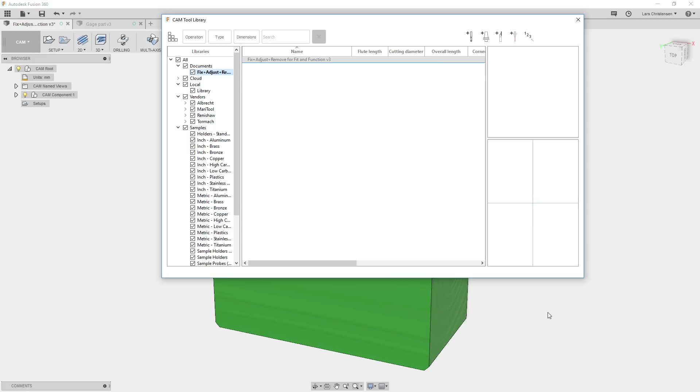You can go back and look on Thursday's live stream if you missed what this generative can do. The other thing I gotta touch on quickly was Friday's live stream on what's new in Cam. If you go in to create a tool library and create a new tool - doesn't really matter what you do here - but we talked about in Lathe that there was a custom thing that was supposed to be here, a new thing that was added. I kind of had to abandon ship on that one.

Well, this one is kind of funny - I should have checked it out before I went live, but you know, who has the time? It was never released out of beta in Cam. That just got missed in the whole process of making everything live. That specific function did not get released out of beta.

But that's not a problem, because if you are using Cam, you can absolutely turn beta on. So let's do that. Inside of Fusion, follow me along here, because there's gonna be a couple of clicks and you just gotta get this right, but you can always rewind the video, of course.

Go to the file drop down, go to view, show text commands, then you get this one little thing here. Make sure that this one is down in the lower right is set to text. Then you type in here: cam, C-A-M, dot beta mode, space, slash on. Hit enter.

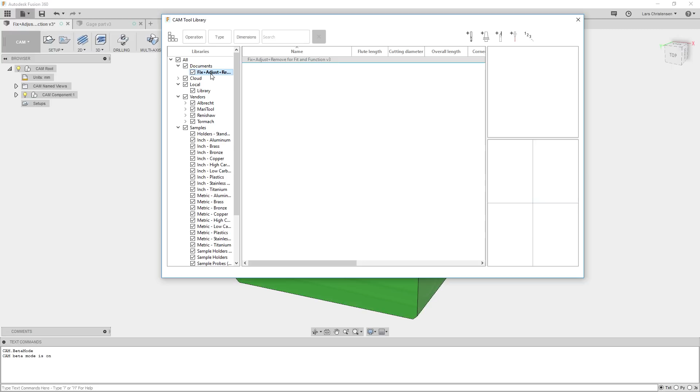Now if we go back into creating a tool library, you will see that this custom function is in here, where you now can create your own custom inserts. Same thing with the holders, custom. So that's how you turn it on or off.

Now if you want to turn it off, you just go back in here, and you probably already figured it out: cam.beta mode space slash off, and it's now off. Then you can go back up to the file drop down, go to view, and say hide text command, and you're back to where I was at.

So just 5 minutes here, just had to correct a couple of things. But yeah, inside of beta mode, you can turn that on and have access to all the beta things that the CAM team is developing on, which is absolutely awesome. And that thing with the custom inserts and custom holders in the lathe, that's where you now can find them until they get released.

Okay, so today we're going to talk a little bit about adjusting, working with models. So what I'm going to do, I got a couple of questions from a couple of people.

One was in regards to 3D printing. The question specifically was, what do I do if I have made a part and I realize that the holes, so I have 2 holes in this part up here, what do I do if they are not the right size? How do I edit them the easiest way? So I'm going to talk about that.

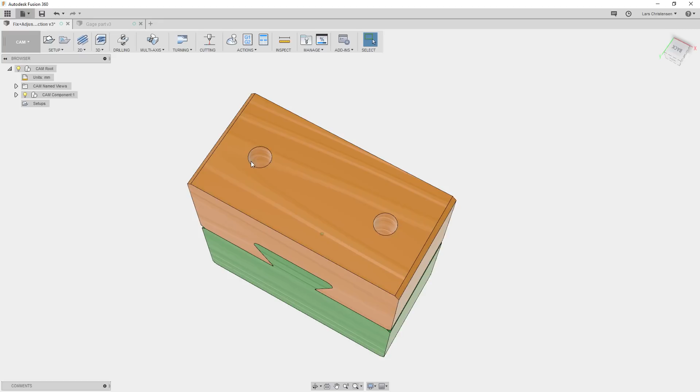So I adjust those. And then I got the same question a while back from somebody working with a metal part. Same thing, wanted to be able to adjust, you know, a dovetail style like this here. So we're gonna talk about that.

And then I just also wanted to add, this goes back to the whole tolerancing thing that I talked about a while back on the live streams. This part here is like a gauge part, and I used to do this a lot when we were testing machines like CMMs and things like that. But this is also applicable for 3D printing, where you make these gauges, and you can see here there's some numbers on them, and you can check clearances and figure out what kind of clearances you should have. Now, if you go down to the description area of this video, you will find this file, so you can have that file, modify it and do whatever you want with it.

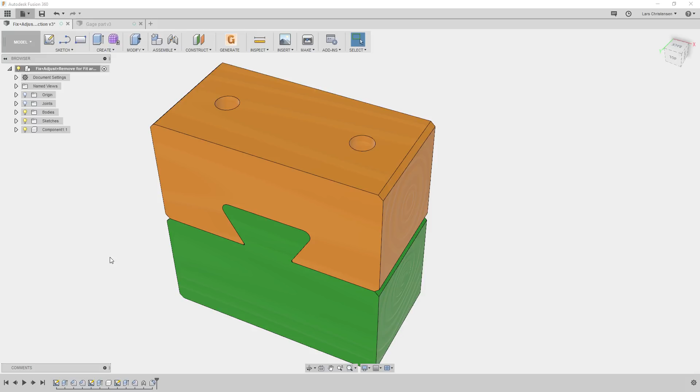And then if we have the time, I sometimes get long-winded, I also wanted to show you how I modeled this whole part up here, because I think some people will get a kick out of that, talking about not always following best practices or different routes to get things done. At least I'll share the way I got to this result here.

You print it out and you suddenly realize that the hole is a little undersized. You know, that's the kind of thing with tolerances with 3D printers, especially with 3D printers. And that's why I recommend you do something like this, where you can test it out on your own and find out how it fits for your 3D printer, right?

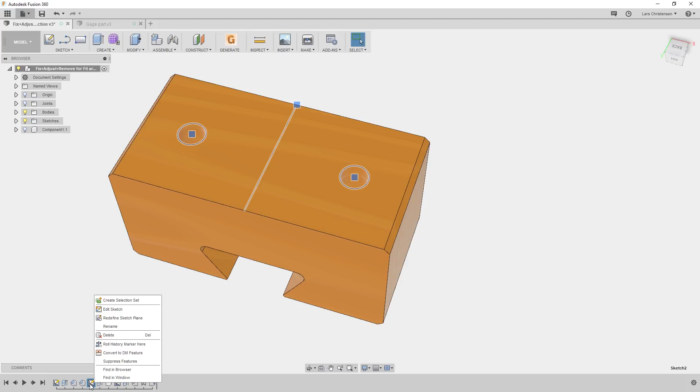Now, one way, of course, to change a hole size is to find it in the sketch. So if I go in here and edit the sketch, you will see that we have this dimension in here, and I have these 2 holes linked together. So if I decided I had to add a little bit of clearance, 0.1 or something like that, of course this would be the easiest way to go ahead, change the sketch, go out again, and now the hole is actually that little bit bigger.

But the other thing you can do, and this is nice especially with imported parts, is that you can also select the inside of the hole, and if you hit the press pull, that's the Q button - all this up here, but I prefer Q on my keyboard - then you actually get the offset face operation here, and that's another way to change the size of a hole. You see, you can type right in here. Now this is offsetting it by a certain amount.

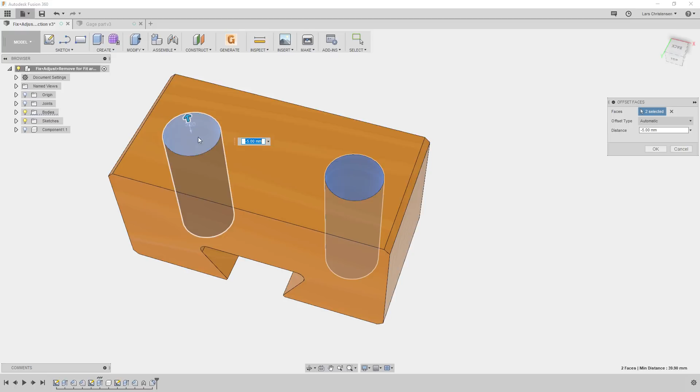So, if I type in 0.1 again - I probably have to go minus 0.1 in this case - you can actually see that shows up down there, that now we've added that to the diameter. You could also select both, so hold down Control, and now it's gonna work on both holes if we added something. This is probably, in my opinion, the quickest way to add a little bit of tolerance to the hole.

Now that would become a feature down in the feature tree in here, where you can adjust that kind of stuff.

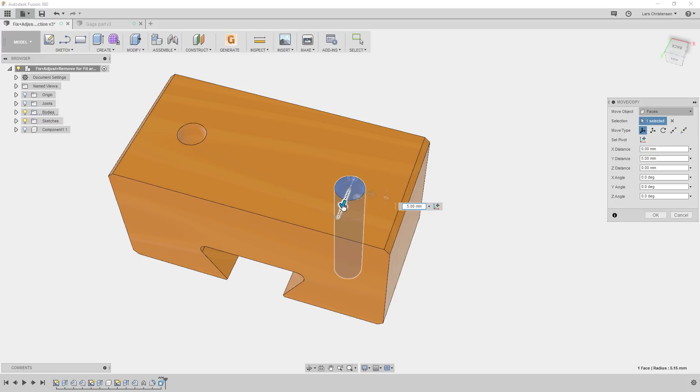Another thing that could be handy to know is that if we right click and select move copy, change the drop down to faces, and select this inside face, we can actually adjust the XY of that hole. That's a nice little trick, could be useful depending on your printer's accuracy and things like that.

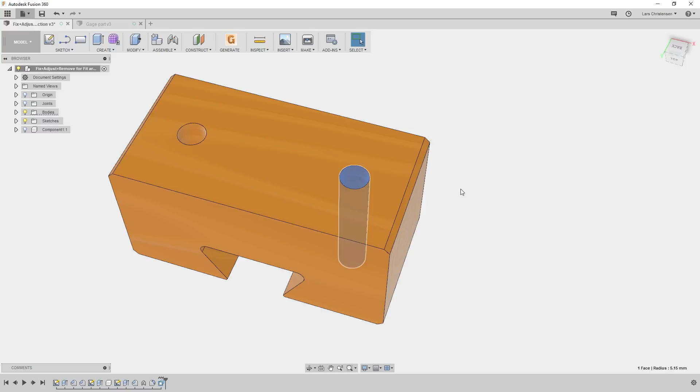Now the last thing I find really cool is that you can remove features in here quickly. You can just click the inside face, and if I hit delete on my keyboard, that hole goes away. If you didn't know that, if you're fairly new to Fusion, select an inside hole and hit delete, and it will go away.

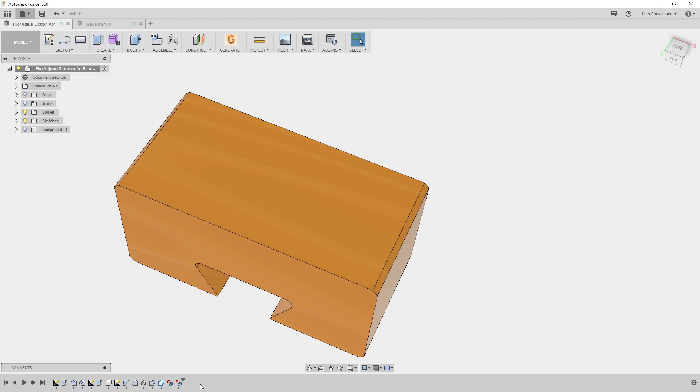And that is also recorded in the timeline. So it's history based. If I roll back here, our holes are back, right? The neat thing is, if you want to get rid of them, just highlight them down here and hit delete on your keyboard, and they're back again.

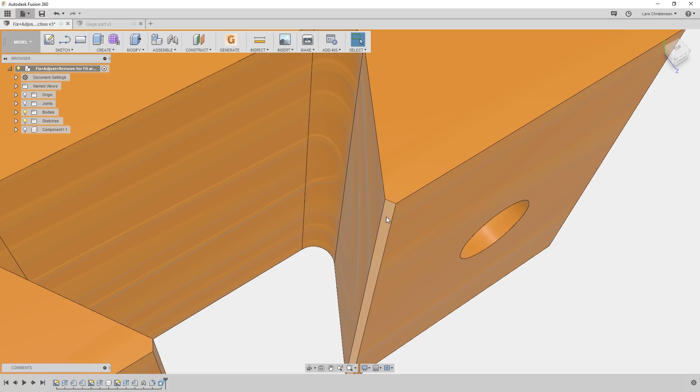The neat thing about this delete feature is it really doesn't come down to how complex this shape is. It's more about what's around it. So if I go in here, hold down Control and select all these faces here, like that, so now I got that whole dovetail style selected, and hit delete. It's like it never happened.

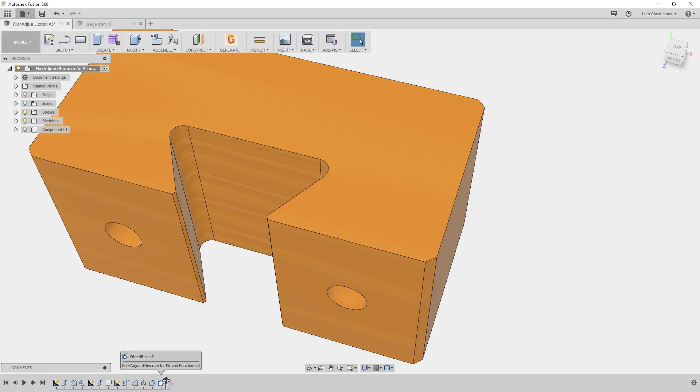So that's a great way to clean up or remove things or work with things, whatever you're into. Now the last thing I want to talk about when it comes to making adjustments like this: let me get rid of the offset face, and get back into the sketch down here. Right click and hit edit sketch, and change this back to 10.

Another thing that can be handy, and I think this is my favorite thing, is that when you're modeling things, you know there could be an issue with something like this. You can make it easier for yourself with the use of parameters. If I model this up and know these holes I'm probably going to have to come back and adjust, and by the way, if you're printing something like this, don't let it print the whole thing before you check the holes, right?

If you just let it print the first, I don't know, 5 millimeters of thickness, you can check the hole already there, before you go all the way through.

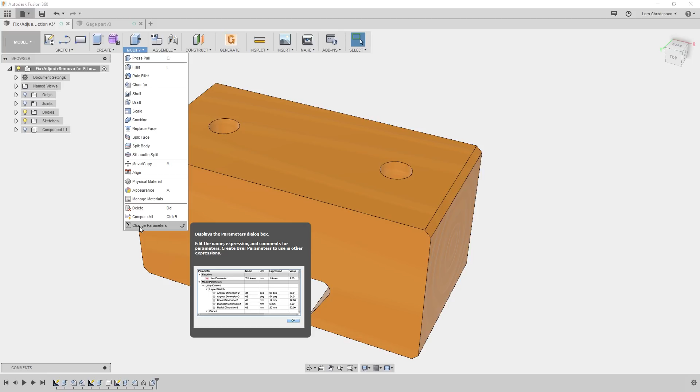But one of the things you could do was go up to modify, and this would be a great time to use parameters. So we could go in here and add a user parameter, and give it a name. I'm going to call it holes, and you got to put some kind of value in here, and I would probably just do the 10, because that's what I know my nominal value is. Now, right now, it doesn't do anything.

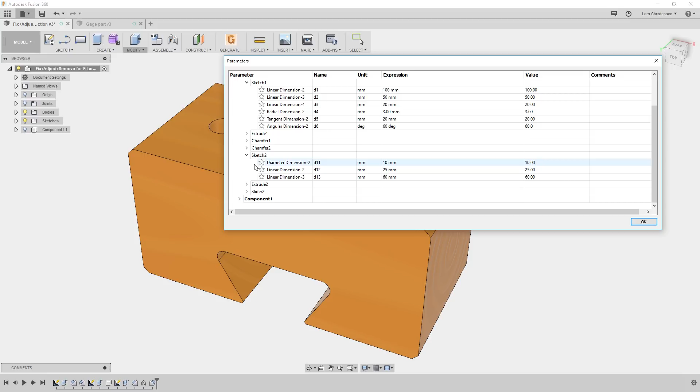But if I go down and find that sketch, what is down here? This is sketch number 2. And I type, there's the 10 millimeters. If I type in holes, you will actually see the hole parameter show up here. Now again, nothing is happening right now, but if I go back up to the 10 here and change it, for example, to 15, you will see the holes just got bigger. Let me change it back to 10. You see that?

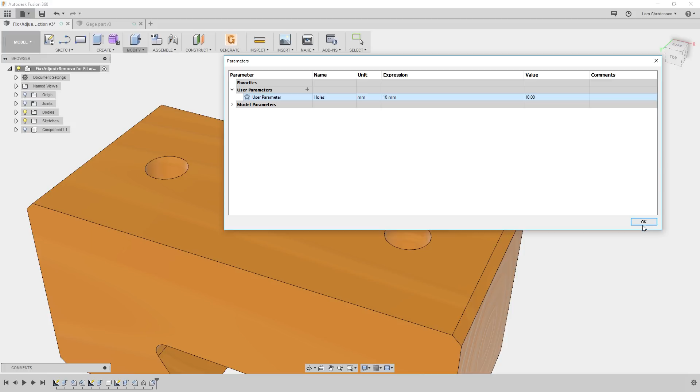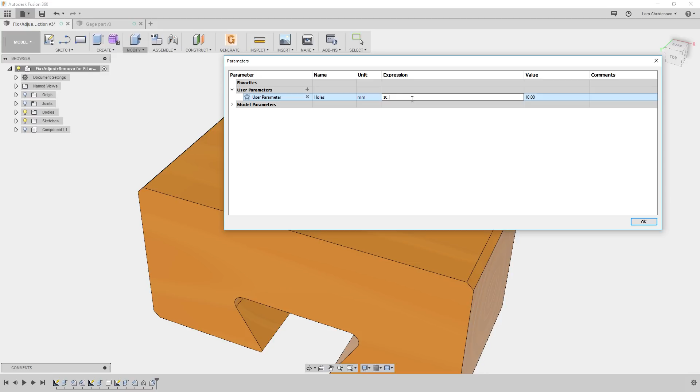That can be a little bit easier way to work with that. And that brings up the dovetail, because the dovetail might seem a little bit more complex in how you want to attack that. One way could be to follow the same approach.

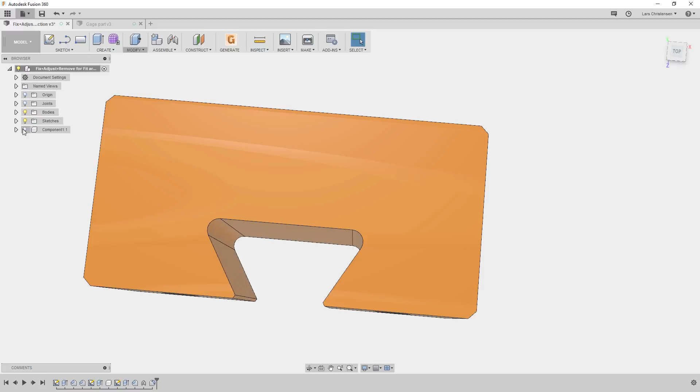Let me turn on the main sliding component here. You could follow the same way as this.

If I go back into the original sketch and edit it, you will see that the height and the width are driven by these 20 and 20 values.

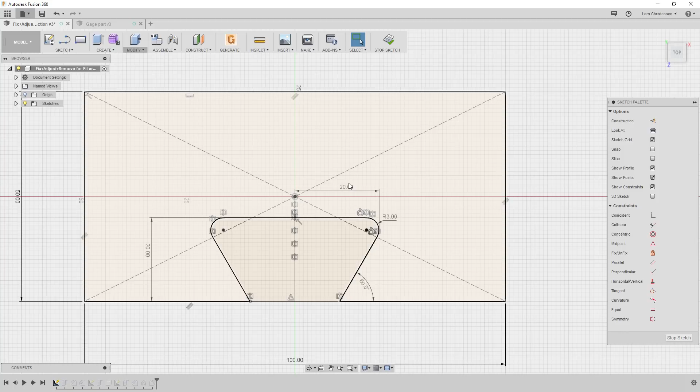Let me add that smaller value in there.

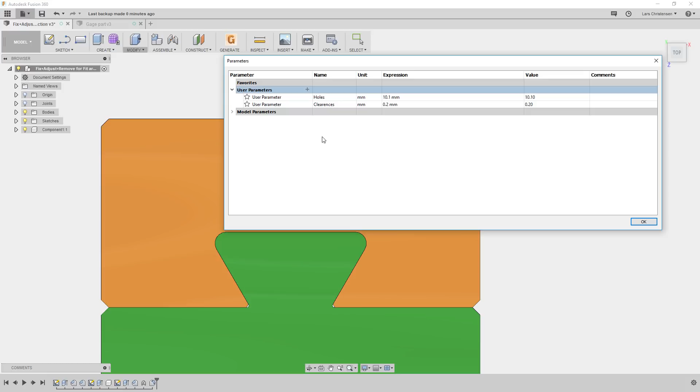Let's make this 0.2, just so maybe it's a little bit more visible. And if we go in and find that sketch, so that's the 20 here and the 20 here.

You could actually write in here, just type in plus clearances. So now when I hit enter, you would actually see that this value gets changed by 0.2.

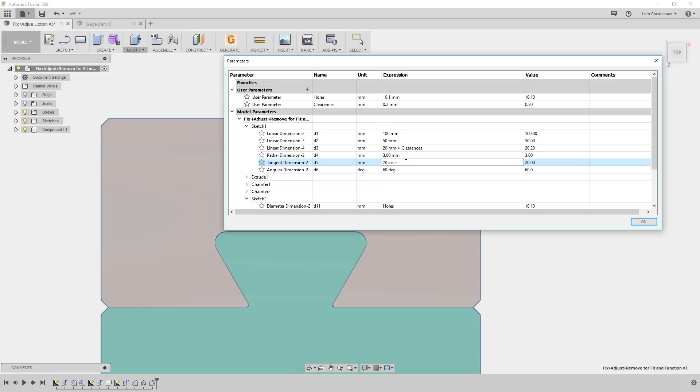So that's another way that you can use. I just hit plus clearances, so you can do it like that — might be a little bit easier for you maybe. When we do it like this, you can add that in there and hit OK.

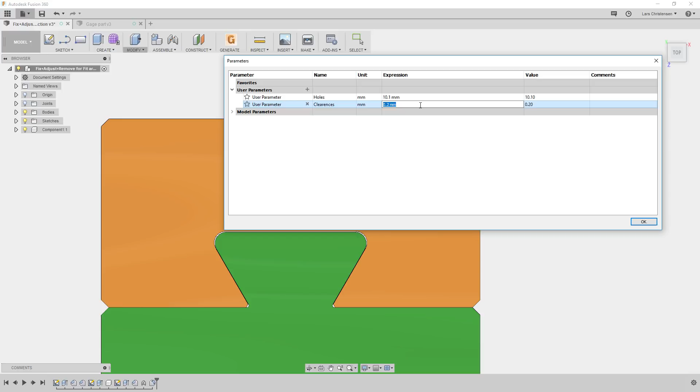Now let me just make it a little bit more extreme. Let's make it 0.5 maybe. What you will see is that this might actually be all right if it was just a matter of opening it up a little bit.

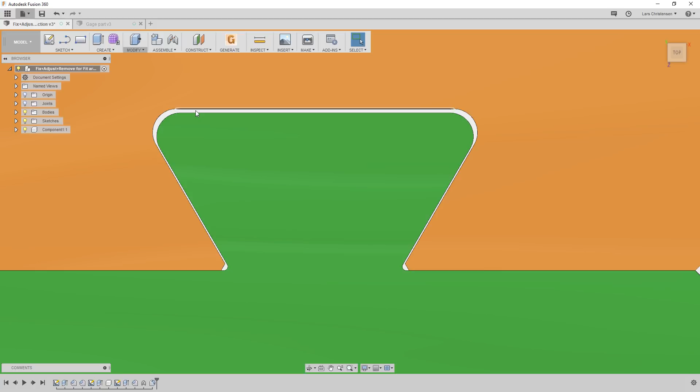But because this is not 45 degrees, this is 60 degrees, you will actually see that this clearance here is not the same. So this might not be the absolutely best way to do that.

So what we could do is go back and change parameters, and let's just abandon this by making it 0 for a second.

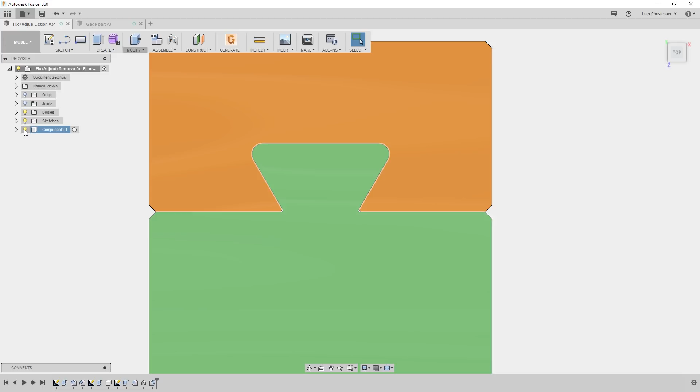The way that I would probably do this would be, let me go in and hide the component here. Let me open up a sketch, create a sketch here. And if I then hit O for offset, now you will notice that if I select an edge, see how it selects the whole outside of it here?

Be aware of that — in the offset you have an unchecked box over here, and now you can just select only the lines that you want.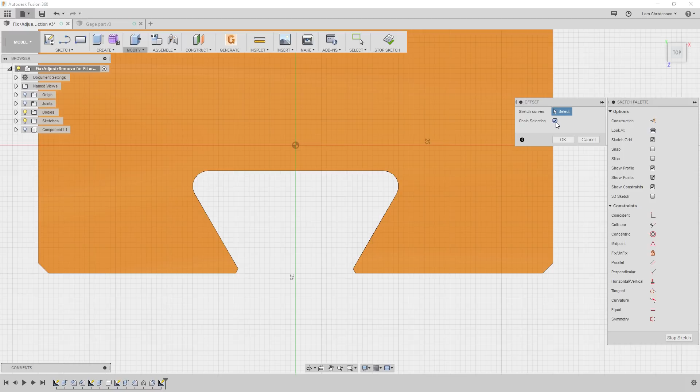Okay? Now of course this is going the wrong way, because that's how it always is in my life. So I'll probably make this a little bit bigger.

Now let's just add a value in here of minus — I'm just going to make it 2.5, just to make it a little bit bigger so it's a little bit easier to see.

Let's hit OK to that, and then I would actually go up and create a line, and I'm going to show you both ways. If I snap into this endpoint here, so now I have a line there, you can...

It will actually snap in here and give you the parallel in here. So that's one way that you could sketch a line down here.

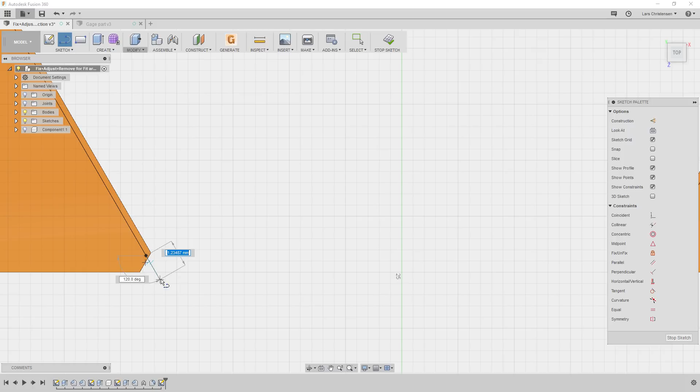But you could also just go out here. Let's go over to here and make sure we snap into that endpoint of the offset line. And then we could use the collinear relationship and say, I want this one and this one. Oh, I did get a relationship.

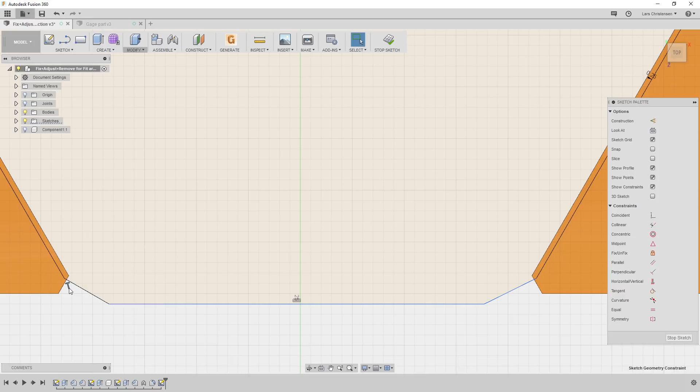See how I got a relationship right there? I got that — when I drew that line, it became perpendicular. It added a relationship to that.

That was my fault. You can just select it. If this happens to you — and this does happen — just select the relationship, click on it, and hit delete, and it goes away. All right, collinear.

Somebody will correct me in the comments.

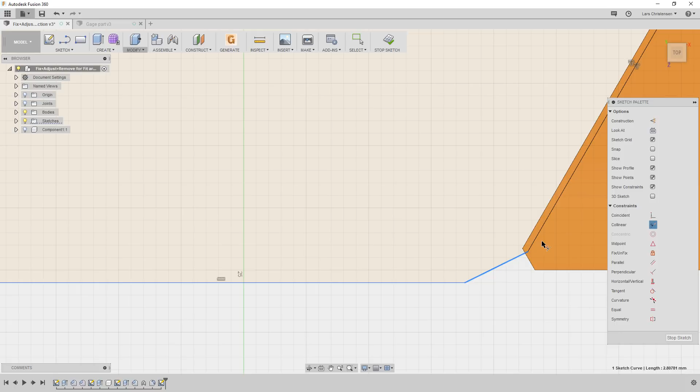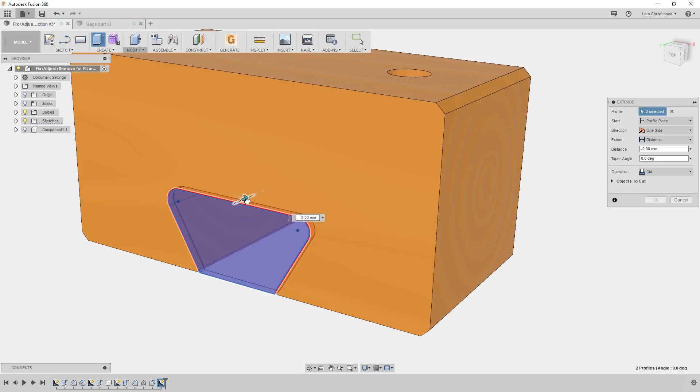Make all these and this one. Right now it's all fully defined, and then you could just do a Q for the standard press pull. Make sure you select everything.

Say to object, select the back side here, change it to the extend faces, and hit OK. So now if we turn the component on and look at it here, now we have a unified clearance.

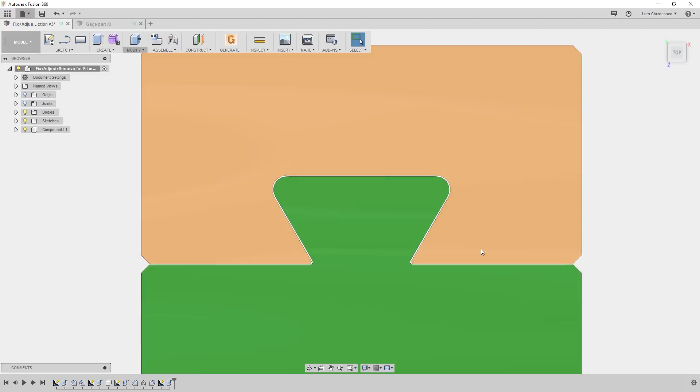And of course this one we could also create into parameters. Change parameters, we can create another one in here. Let's call this one offset, because that was what we did. And let's just make it 0.1.

Is that a norm? That's normal clearance, at least if it was like steel or something like that—be a good, somewhat slip fit clearance, depending on how big the part is. I think this one is 50 millimeters, whatever.

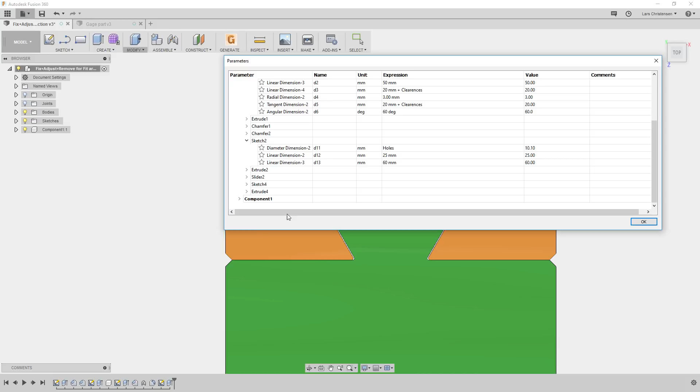Hit OK to that, and that is called offset. So let's find that, and that's the last sketch now. I know that in this one here. Change that to offset, just hit O, and it will show up.

And now we've essentially done the same thing, that we added that offset in here. So now that is controllable on the parameter. So now we have 3 different ways to do this.

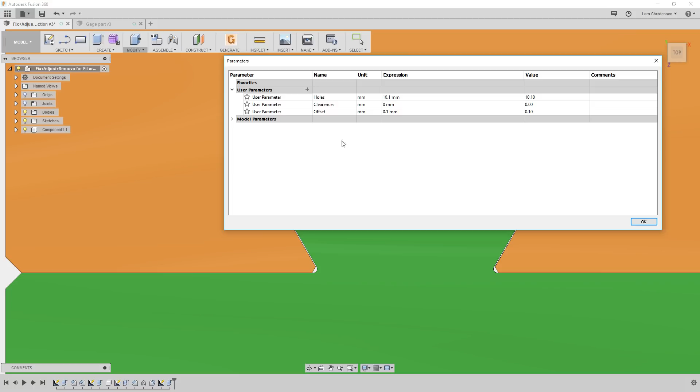This is probably how I would do it—if I know that this is something I've got to mess around with on a somewhat regular basis, I think parameters is a great way to work with that.

If you don't want parameters to be hunting down here, just click on that little add to toolbar, and it's now part of your toolbar, right? Next, that arrow next to it, and now it's part of that, and it can show up here.

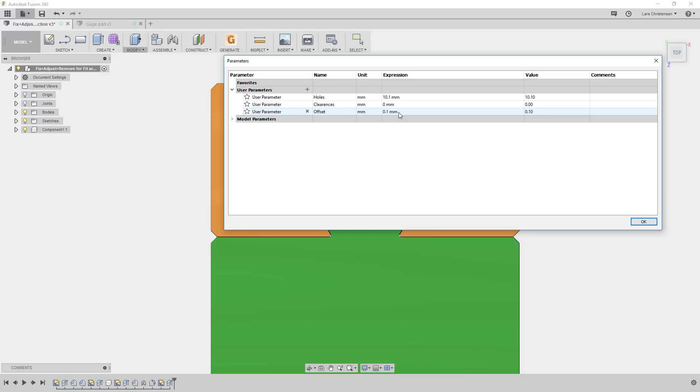So I hope that this kind of answered a few questions in regard to how you can work with that. If you don't want it in there anymore, you can just drag it right off, and then it's back in here again. So this was kind of what I planned on showing.

I don't know, maybe this went a little fast, but you can always go back and rewatch this, rewind it, rewatch it, and don't forget these clearances.

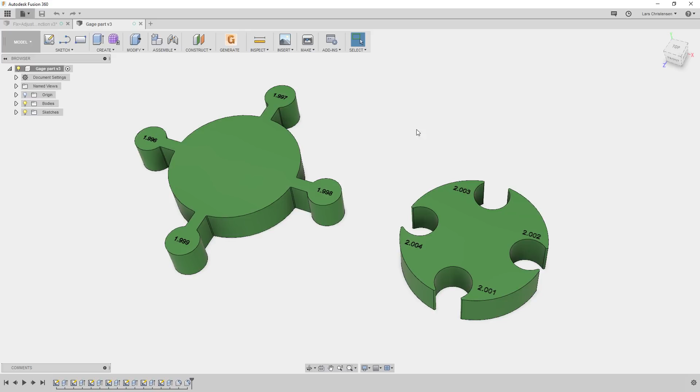Okay, so I hope this was good. Let me just run through how I modeled up this part, because that's one of the things people... there's some things going on. There was a movement and some different things.

And I know that, like I said before, I learned a lot by seeing other people model up. I think that's actually where I learned the most. And people are always looking for the right way to model up, and you've heard me argue before, I don't think there is any right way.

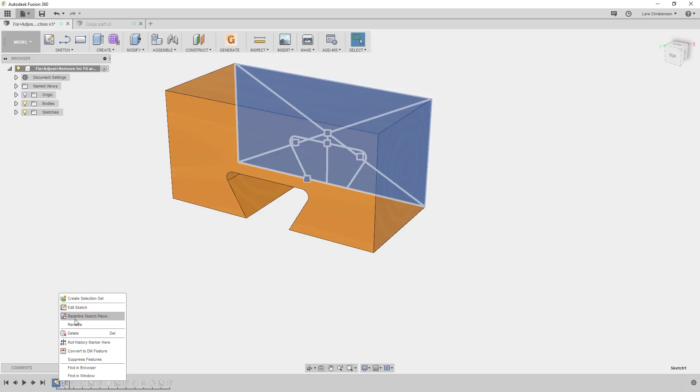But the way I did this one, and the easiest way to kind of find it out, of course, is just to roll back. So this one started out with a 2D sketch where I modeled up this part here.

And the way I did that—let me start a new sketch—was I started out with a center rectangle, so S key, and my center rectangle right there. And I made this one 50 by 100.

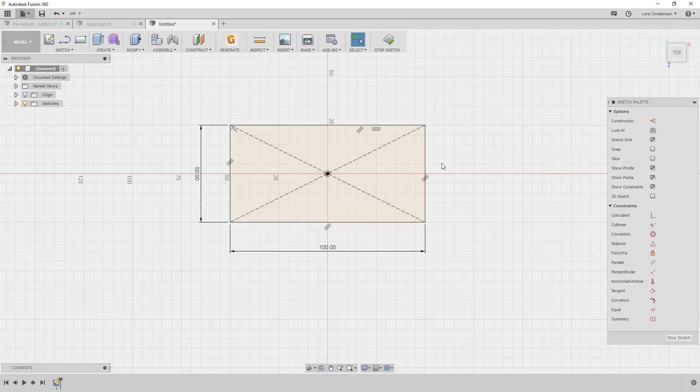Now when it came to draw up the dovetail, what I actually did was I drew a line from the midpoint here up to the origin, and then I drew kind of like out my dovetail like this, and down like this. And I knew that, because it seemed like a nice way to draw it up and visualize it, I added a fillet.

So adding a fillet in here, and I made it 3 millimeters, and then I hit D for dimension, and I added 20 millimeters here.

And then to do the width here, if you don't know, you can, with the dimension tool active, right click, and select pick a tangent of an arc, so it doesn't pick the center, tangent of an arc. Now I get the tangent of that outside of that fillet instead of the center point. And then I actually just mirrored it over.

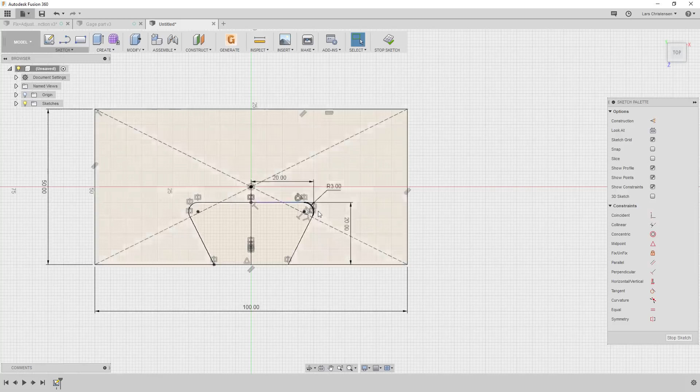So in the sketch, I used the mirror command, mirroring over the first line I drew, because I knew that if I started out drawing the whole thing, relationships and dimensions can quickly become confusing. So I prefer to use the mirror command for something like this, what we call symmetrical modeling.

Then I hit Q, press pull. If you don't see the view rotate, it's probably because you're not on perspective with ortho faces. That will normally rotate it.

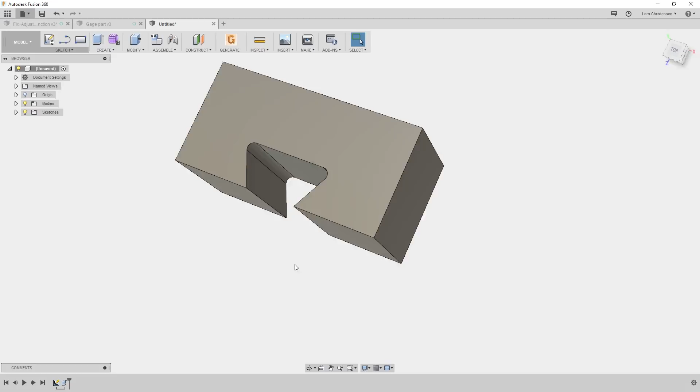I made it 50 millimeters long like this. I placed the two holes on top, that was next. Oh, I added a couple of fillets to it, there on the inside and on the outside here.

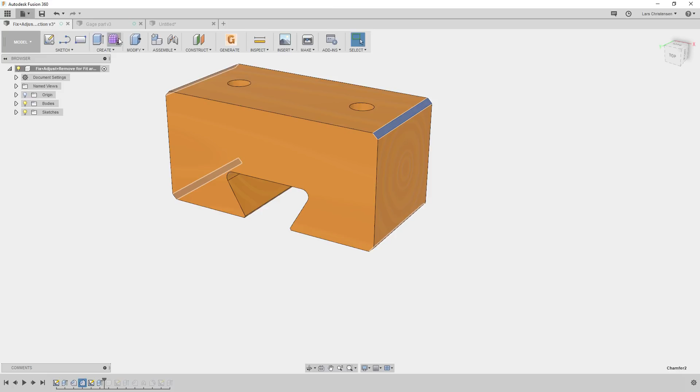Then I drew the two holes. Nothing too crazy here, I think. I start a new sketch on the top face. I always start out with C for circle, and I just draw two circles, just like that.

They've got to be the same size, so I make them equal. Then I hit D for dimension, and place a dimension here. Now I have one dimension controlling both holes. This just makes it easier by using that equal command.

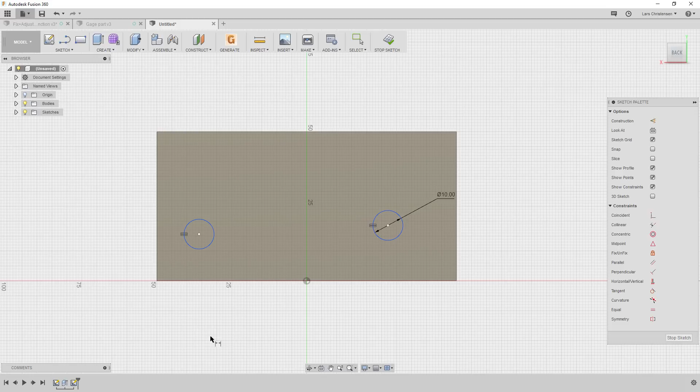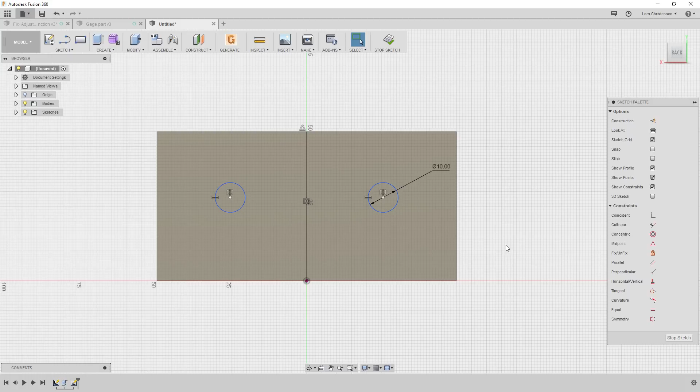So now I could hit D for dimension and place a dimension between the centers here, make that 50, and a dimension down to here, make it 25, and they were now fully defined. Hit Q, press pull, and drag the arrow down and do through all, okay?

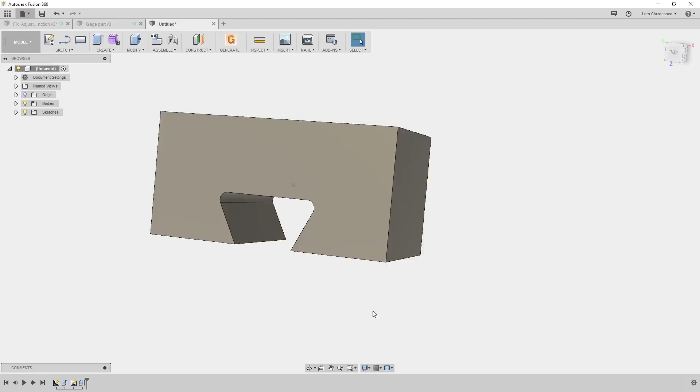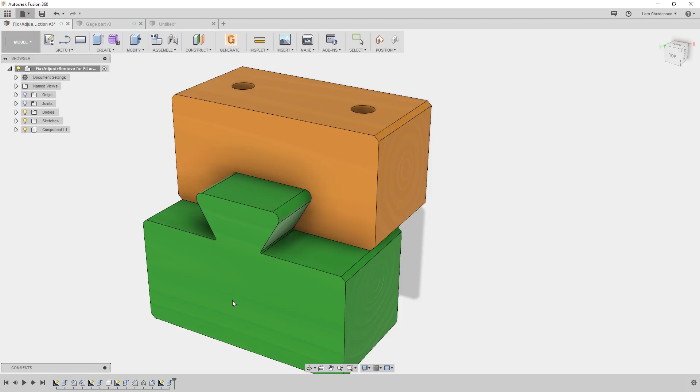Now I did this, and then I realized I wanted this part here, the green part, as a reference. It wasn't really meant to do anything other than to show - this was my main part, but I wanted a reference part, and I wanted to be able to show it slide. Makes life a little easier.

Now if you've got to do any kind of slide, you need to use some kind of assemble or as-built joint here. Now many of you who have been around for a while will be like, oops, you didn't follow rule number one, which was to create a new component first.

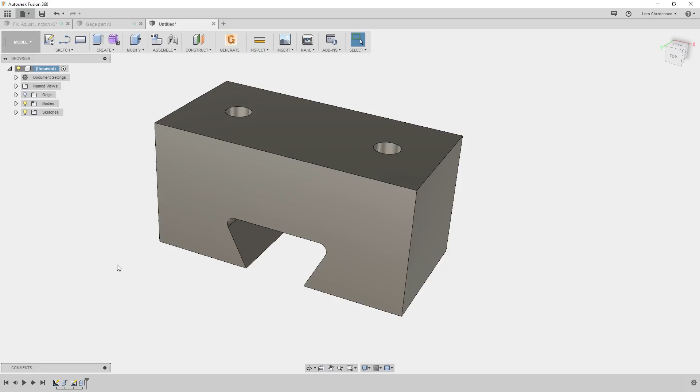But this is where we can start talking about best practices, where I'm more about getting to the end result than following - I don't need to follow the world's best path. I really didn't care about this being a component so I could use the joint, but I needed the other one of them to be a component. So I just created a new component, right click up here, new component, okay?

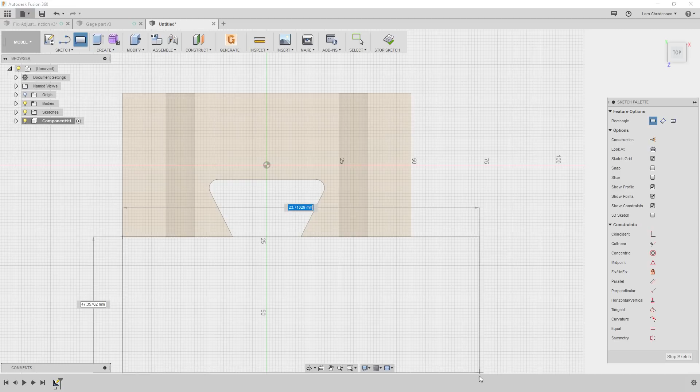That I needed to create a sketch for, so I create a sketch on this face, and I drew a 2-point rectangle, and snapped it into this corner of our first body, drew it a little bit too big. So then I can use collinear from here to here and give it a dimension, I gave it 50, just like I did before.

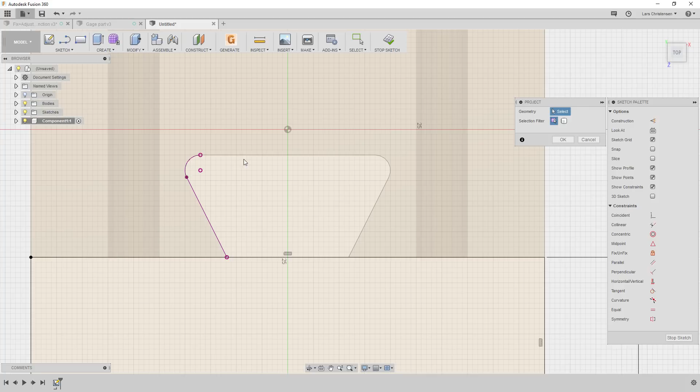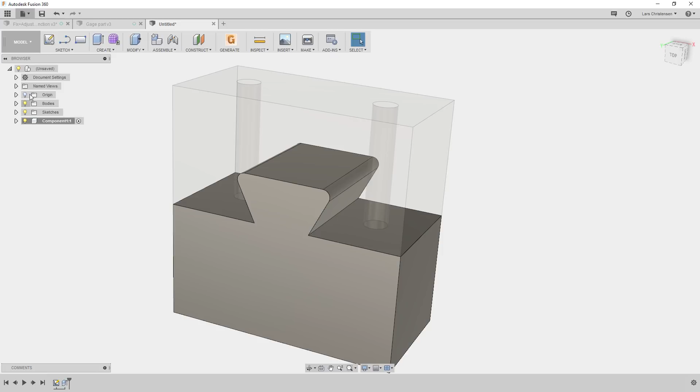Now to get this dovetail in here, the first way around, I actually hit P for project, and just projected those edges from our original body. I'm assuming some people are thinking, yeah, that's absolutely the easiest way to do this, because if I go ahead and hit Q now, and create this new body here, like that, then I got what I was after with a dovetail.

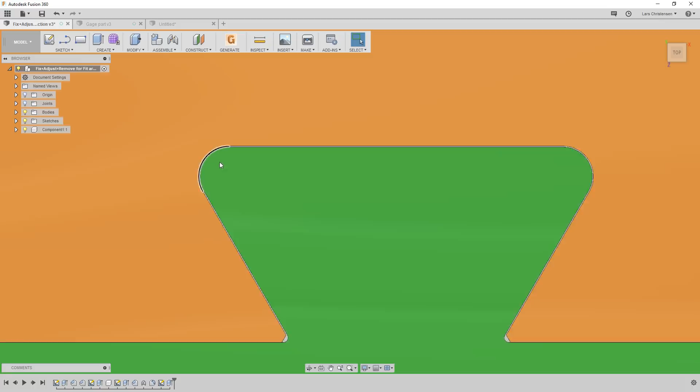My only problem was then I could not have shown you the clearance that I put in there, because if I had, since the green one is following the orange one, it never showed anything, and you wouldn't actually get any clearance. That wouldn't have mattered if you were just going ahead to 3D print this thing.

You could have done all the things, but I wanted to be able to show the gap here. So I actually had to backtrack just to show you that I also do that. So let's go back into the sketch here.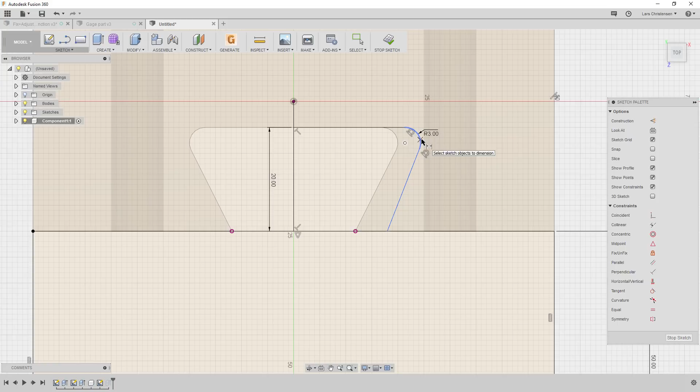It's going to highlight these, hit delete. And then I actually drew it up the exact same way as I did before. I just drew a line up to about here - doesn't really matter how long that line was. And then I drew this out like this and did a fillet, made that one 3. I then put a dimension from here to here, made that 20, right click, select tangent from here to here, made that 20, and then the angle here was 60.

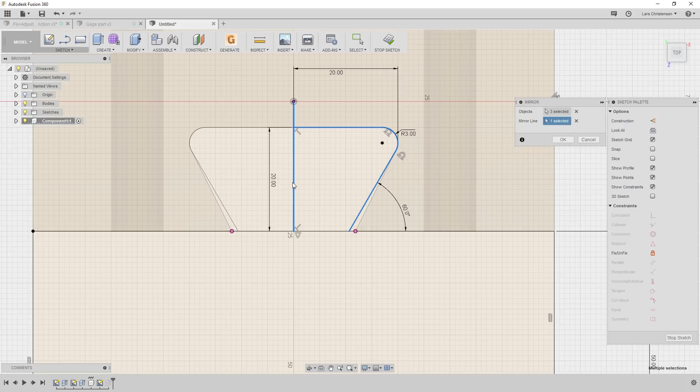And then I did the mirror over the line, select the 3 entities. Oh, it looks like I'm missing something. Okay, I'm not quite sure. Did this here. Somebody right now is yelling at me what I'm doing wrong, but that's okay. So I did this, and did I make the other one another angle or something like that? Alright, I'm not gonna worry about it.

Stop sketch. Now you'll see there's a hole now. That's because I deleted one feature. I gotta reselect this in here. I'm not sure why there's a gap. I'm not gonna troubleshoot that. Yes, I am. What did I do with the first one? Didn't I give the first one a dimension?

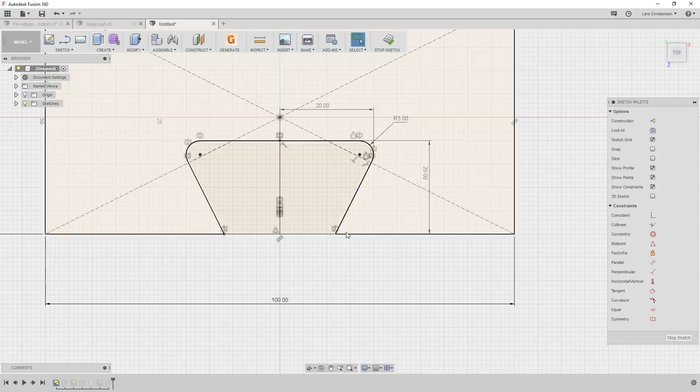So I did. I didn't give it an... oh, I didn't give it an angle. So what did this line snap into? Okay. Oh, because it became tangent, probably. Right? Is that it? I gave it a tangency.

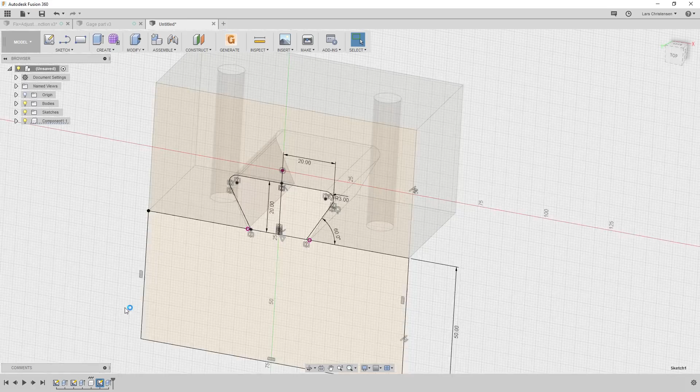Let's go into this one. Edit the sketch. Delete. No, it should still be tangent. Somebody in the comments is yelling at me right now. Alright.

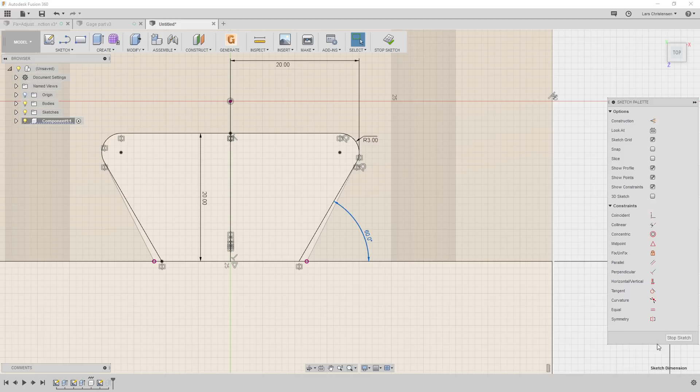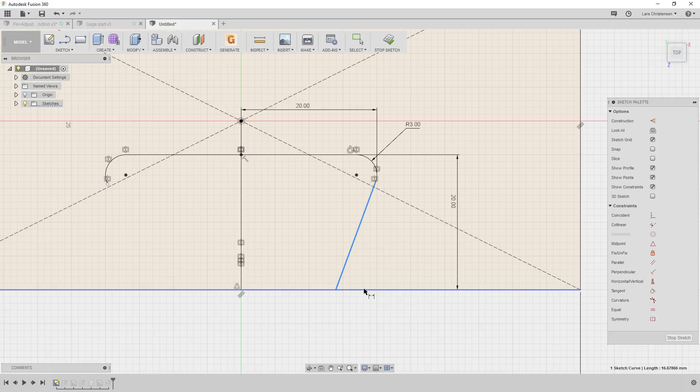So, if I didn't make the first one 60 - this is the first one I just drew up - I was going to delete these two. Line. I don't know what I snapped into when I did this. Something like that. Can I still make that tangent?

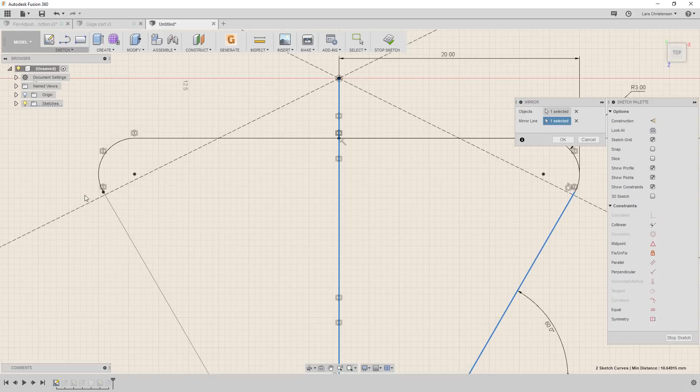Okay, and let's mirror that across. Yeah, that should still be okay. Stop.

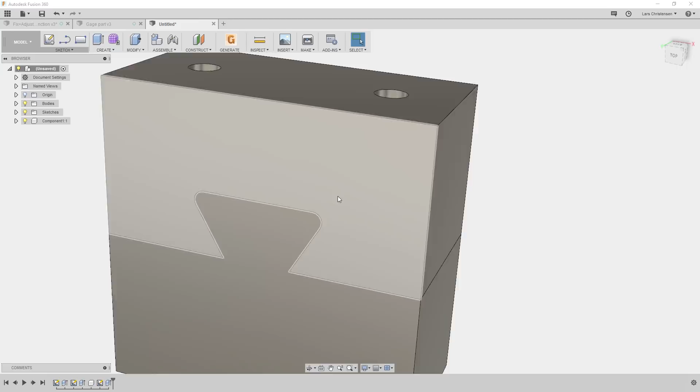Okay, let's just hide that component there because it didn't get into that. Good. See, when you change this, okay, so I don't know what I did with the first one. So I did this here. Now, this is a component, which means that this can now move around, right? Just Control Z to undo. So what I did here was I went in and used an as-built joint, because I can do an as-built joint between this body and

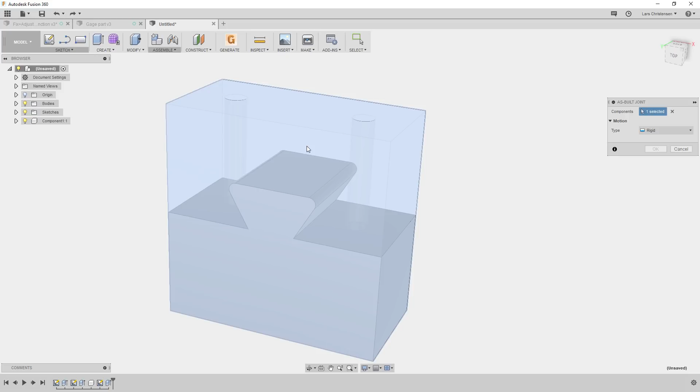this here. Now it defaults to rigid. I'm going to select slide, and then I'm going to select what it's going to slide through. It doesn't really matter, like that there, and then you have the sliding thing through right there. So that was how I modeled this part up.

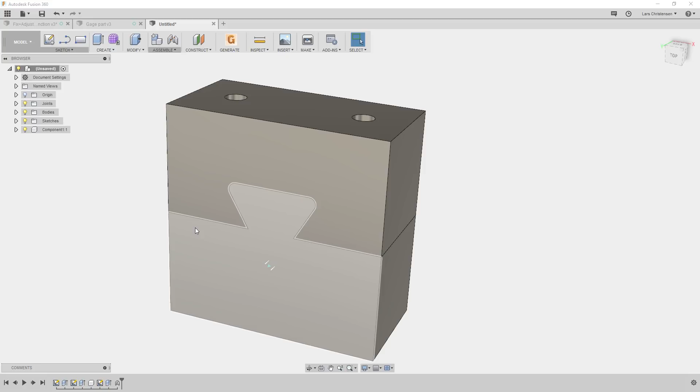I added a couple of fillets to it, but I just wanted to point out some interesting steps, I think, of getting to the end result. Oh, and then I added some colors here.

Do you guys ever play around with the appearances? Right click, appearances - I was just playing around. Like if you're getting into wood solids, painted, there's all different kinds of colors and different things. And you can always click, if you just see the little arrow, you click on that, and then you can download colors and put all different kinds of colors on.

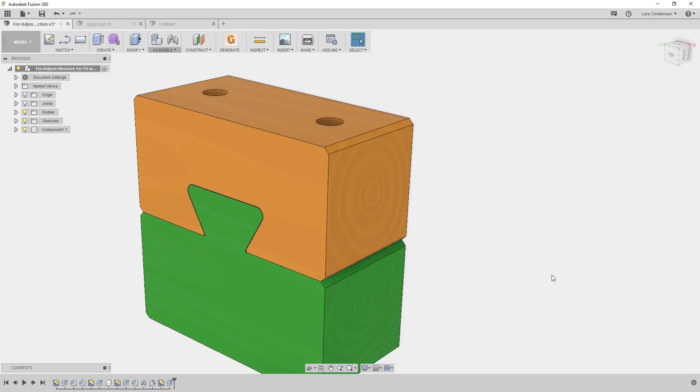All right. Woo. I hope that this was useful. Went over a few minutes because I gotta troubleshoot my own mistakes. But people always appreciate that. That's it. Leave it here.